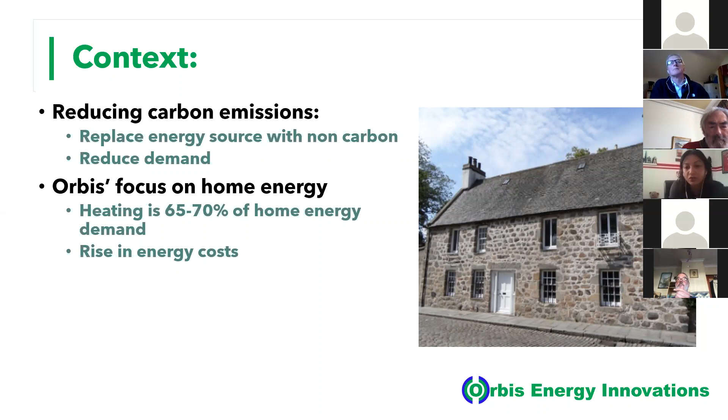Our focus at Orbis is on home energy. Why? Because on average, home heating is attributed to around 65 to 70% of home energy demand. We know energy costs have risen over the years, making it less and less affordable to heat our homes, and these costs will more than likely continue to rise in the future.

Climate change and elimination of fuel poverty are two strategic objectives for the Scottish Government. They are committed to spending billions of pounds in years to come to improve our homes, making them more energy efficient and cheaper to heat and maintain.

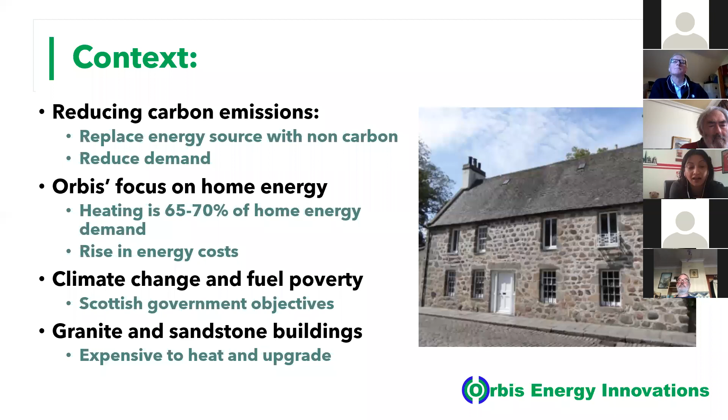Here in Scotland, we are quite unique. We enjoy a terrific legacy of granite and sandstone buildings. They are lovely to look at, but if you've ever lived in one, you will know that they are terribly expensive to heat and upgrade, not to mention very cold, especially through the winter.

Let me introduce you to us as a company. We were set up recently to commercialise a new internal wall insulation system designed specifically for granite and sandstone buildings. Why granite and sandstone? Well, we recognise that traditional methods of insulating such buildings do not produce the same performance as they would for other types of buildings.

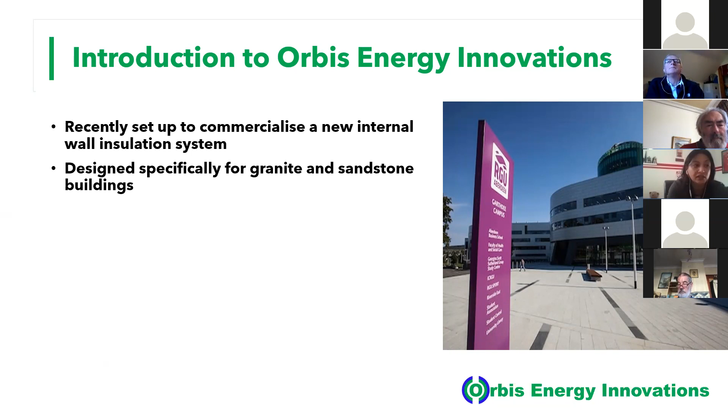The average heat loss through walls is around 30%. Heat loss through granite is much higher, around 50 to 60%, could even be argued that it's higher. We have an abundance of these properties being left empty, unloved, and will eventually probably be knocked down to make way for newer buildings. If maintaining and upgrading these buildings were cheaper, easier, more efficient, then this doesn't need to be the case.

At the very heart of our design is understanding why these buildings are so hard to heat and what makes them so unique. So we enlisted the support of RGU's, Robert Gordon University, Scott Sutherland School of Architecture, and they analysed and characterised our design. We have devised what we believe to be the most efficient insulation method for these iconic buildings. Their analysis shows up to 93% reduction in heat loss in the treated walls with our internal wall insulation.

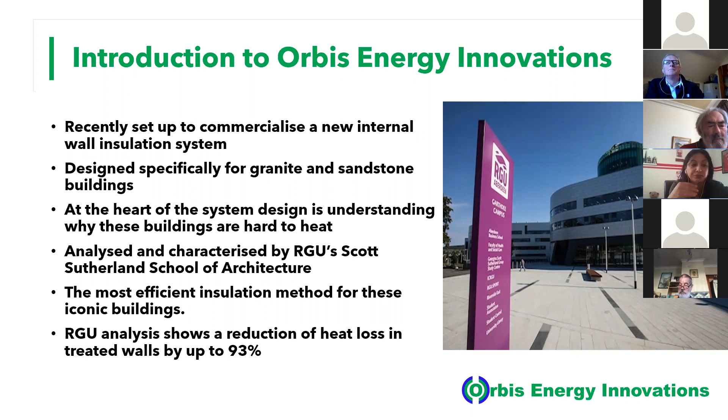So let's look at what the issue is with granite and why it's so hard to heat. We start with one simple rule: the heat that you require in a property is equal to the heat that leaves it. The image on this slide shows the different heat loss paths. Heat escapes or transfers by three mechanisms: conduction, convection, and infiltration.

Conduction is when heat is transferred from the warm to the cooler part of the solid wall. Convection is when heat is transferred and replaced by cooler air, so the air flows up from under the floor, up inside the lath layer, and ends up in the loft. Infiltration losses happen via leakages in the building construction, such as cracks, gaps, around the windows, electrical points, etc.

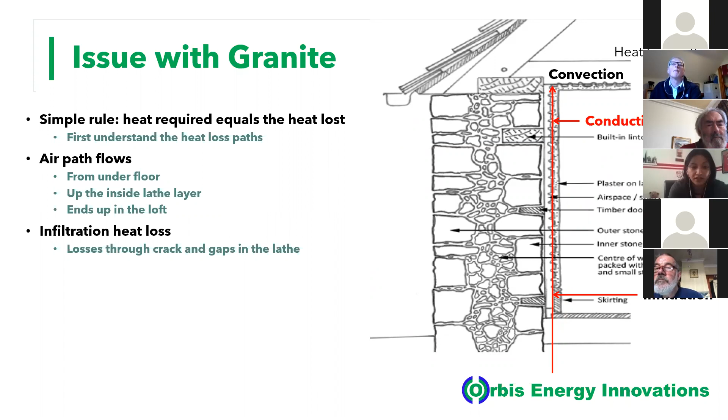The outer wall itself is ineffective as a heat barrier. The only effective insulation is therefore the lath and plaster. Hence the difficulty in retaining heat in these types of buildings. Now, retaining the airflow behind the lath and plaster is vital - this is what keeps the granite surface and the inner lath layer dry.

U values. For those of you that aren't aware, U values are a measure of the flow or rate of heat transfer through an insulating or building material. The lower the value, the better the insulating material. The higher the value, the greater the heat loss.

BRE, the Building Research Establishment, expressly states in its handbook that when calculating the U value, if the cavity is ventilated, then the outer granite layer is excluded from the calculations. Now, either this is ignored or maybe it's just not made aware that the cavity is ventilated, and because of this you would end up with a lower U value, 1.3 as opposed to 4.3. The difference itself is huge. If the cavity layer is filled with insulation, then at that point the granite layer is considered in that calculation.

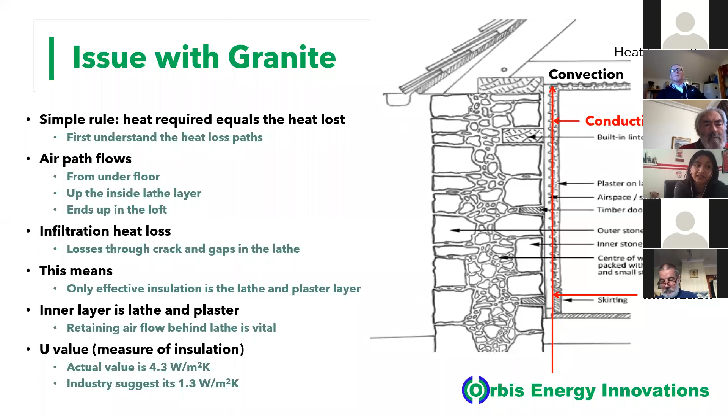What are the current insulation solutions available on the market at the moment? We have external insulation, which is quite common. The cavity remains, as per BRE guidelines, and the external insulation is rendered useless.

Stripping out and relining can possibly involve timber frame. It appears to be the best solution, but we also know that this is both costly and very messy, and you'd have to be pretty brave to do this without moving out. Filling the cavity, for obvious reasons, would not be recommended and can create further problems.

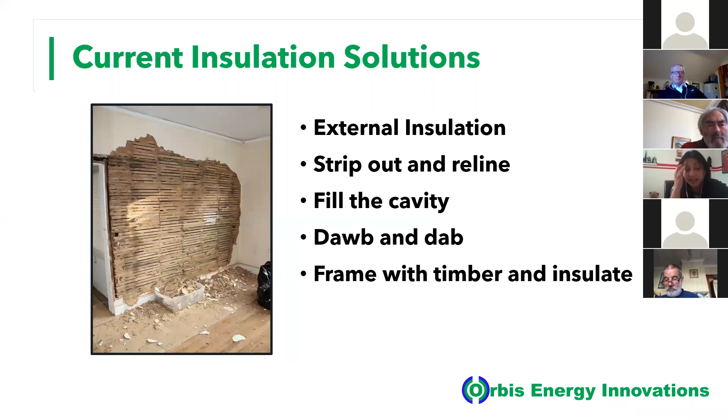Dawb and dab, for example, is the gluing of insulation boards directly onto the lath layer - the lath would need to be sound, which unfortunately in these types of buildings often it isn't. Framing with timber and insulating can be costly and doesn't address cold bridging issues. And also one some of you may have heard of before, Matilda's blanket. The Orbis system is similar to Matilda's blanket, but Matilda's blanket is 3 times the cost of the Orbis system.

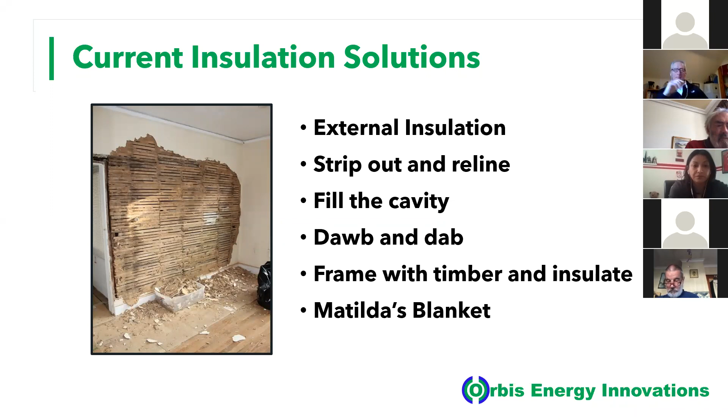The Orbis internal wall insulation system is an engineered form of framing and insulation, which has been tested and characterized by RGU Scott Sutherland School of Architecture. It's designed to be fast to install, with minimal mess, more affordable than competitors, more effective, and also impart structural integrity to walls.

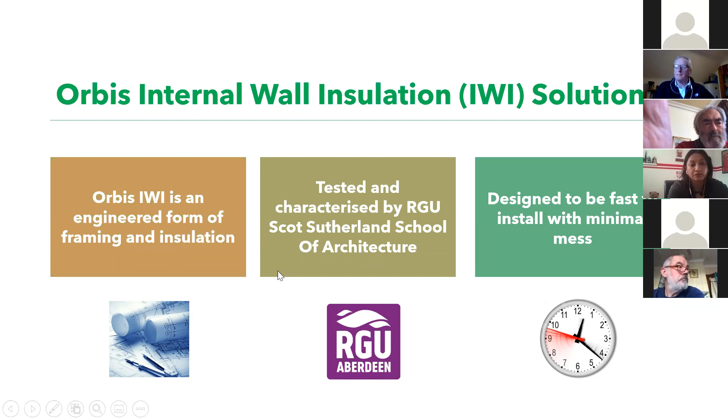What benefits does the Orbis internal wall insulation system bring? Up to 93% reduction in heat loss through the treated wall - that's quite high. We also support local business, trades, economy, jobs, etc. Of course, it adds to the home and the rental value. Improved air quality means improved health and well-being.

As mentioned before, minimal mess and disruption - there would be no need to move out of the home. More than likely, you could just move the furniture to one side. It's quick and easy to install. The house is cheaper to heat and stays warmer for longer. It comes with a product and install guarantee, and we only use trusted and certified installers.

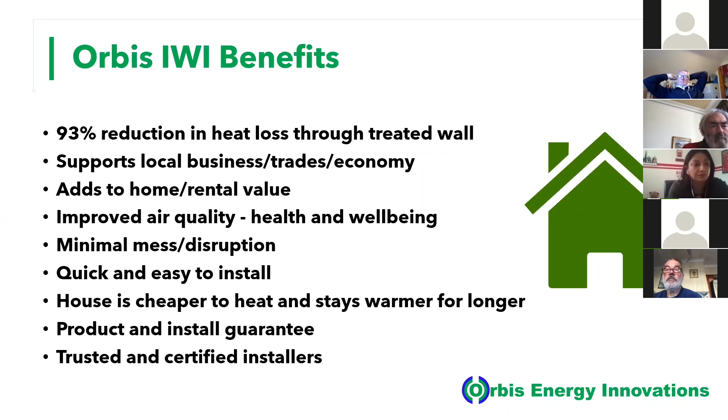Let's look at the results that we found. Remember, the U value, shown here in red, is how we express the rate of transfer of heat through that wall. Here we've got two U values, one for uninsulated and the other for the insulated Orbis internal wall insulation system. The temperature in the cavity is 0 degrees, and the temperature we want the room to be is 21 degrees.

The heat loss is 90 watts per square meter. Now this is a 20 square meter wall. The house is heated for 180 days per year, on average of 12 hours a day.

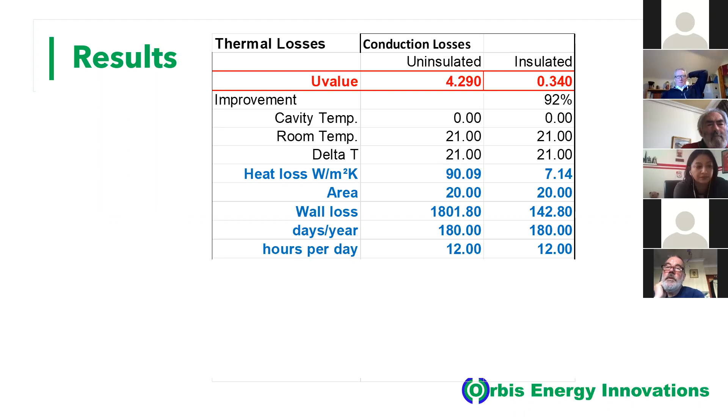If we compare the results for uninsulated with insulated, the total heat loss difference and carbon emissions difference is pretty big, assuming that energy costs stay the same. What does this mean in terms of cost per year? Well, £18.51 as opposed to £233.51. That's a 92% saving. The cost of insulation here would be less than £2,000, and the payback is somewhere between 7 to 9 years.

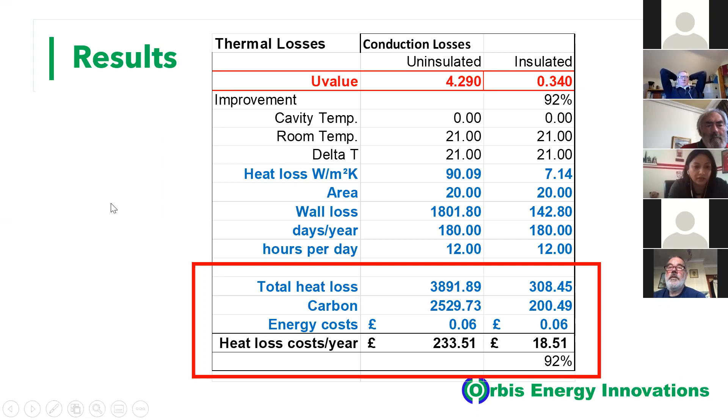So the next slide I'm going to show you is an animation of how the internal wall insulation is actually installed. I'll try and talk you through it. Some of it is a little bit quicker than I can talk through, but here goes. So this is your typical wall.

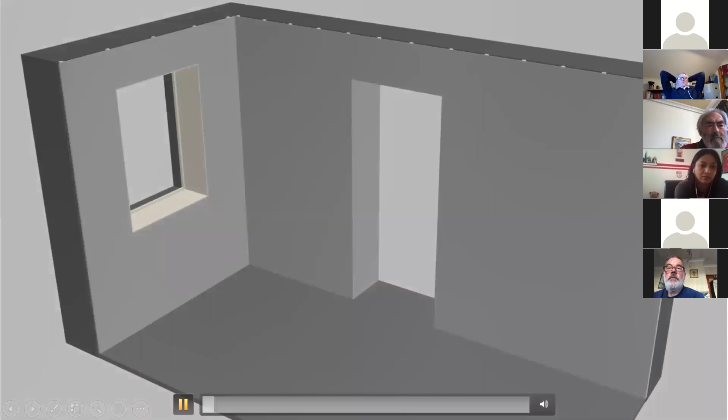To start with, the timber battens go on top of the lath and plaster. These pick up the vertical battens that hold the lath. The blue section you see here is our carrier system. These are what holds the insulation boards in place, so you'll see the insulation boards going on there.

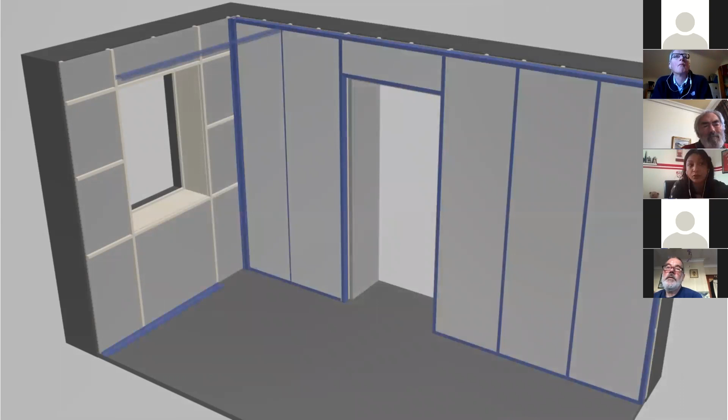The survey and thermal imaging is carried out prior to the install. From this, we can easily identify cold bridges. Debris, for example, may build up over the years, and once identified, we can resolve this before we do the install. Any services such as light switches, electrical points, radiators, etc., they can all be brought forward where required.

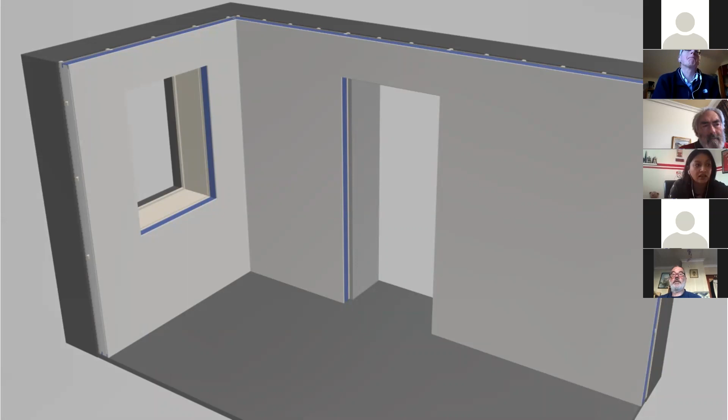So that's the installation going on. Then on top, we have the plasterboard, followed by Ames tape and decoration. It could be argued that probably the most time-consuming job would be the Ames taping. It's quick and easy to install, and there's no need to move out. Our carrier is cheaper and easier to work with on site than any of our competitors, and it has better thermal performance, especially at cold bridging sites.

The Orbis internal wall insulation approach is architecturally led, and the system is deliberately designed to be cost effective, easy to install, minimal mess. The benefits the system can bring are huge, both in terms of carbon emissions and eliminating fuel poverty. Our launch has unfortunately been delayed due to the current climate - we should have launched by now, but obviously we've had to change that, and our aim is to launch within a short time frame of lockdown conditions easing.

We're also looking for investors. This may appeal to private investors, in particular those looking for ethical investment opportunities - I know that's always a difficult one. Our ethos is based on reducing carbon emissions, supporting the local economy, and preserving the life of these iconic buildings by making them affordable and easy to upgrade and maintain.